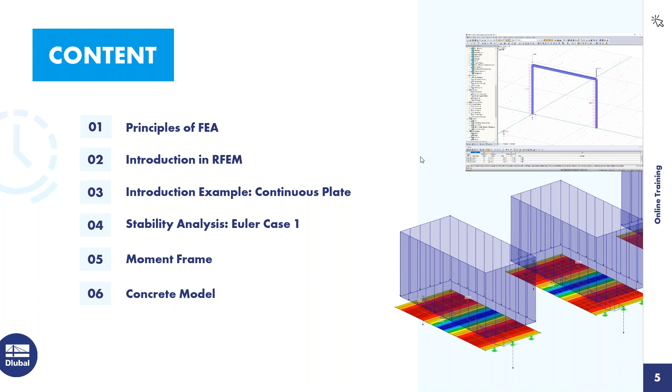So now we can dive right into the first subject, which is the basics of FEA software. When using computer software like FEA software, it is mostly and usually based on the displacement method. Another method you may be aware of is the force method, where the unknown is the force and the internal forces need to be calculated or can be calculated.

With the displacement method, the unknown is the displacement. So to solve for this, the displacement vectors must be calculated, and then the internal forces and support reactions can be determined. So the main problem today is an analytical solution can be difficult to determine with large complicated structures. Doing hand calculations for some structures with complicated and odd geometry can almost be impossible or feel like it's impossible. The limits are being reached with large complicated structures, and it's just difficult to get accurate results.

And so this is where FEA software comes in. Structures can now be modeled and converted into a finite interconnected element mesh. Then the material and cross-section properties are determined or given at each FE mesh node. And then the mechanical behavior is transferred between these elements.

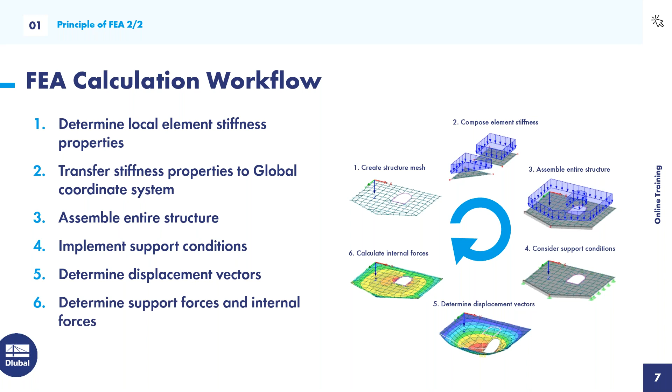So now we can move on to our example. For this example, you can see a couple of continuous plates, and then we are going to compare the moments between these plates with the continuous beam on the end so we can get an idea of how the calculation differs between those.

But before we do that, I do have a question or a test to give, so I'm going to pull that up. You should see that on your screen right now. I'll give everyone about a minute to answer that, and then we can go over the answers.

Okay, it looks like almost everyone has answered, so I'm going to close the question. You can see the results here: 18% of you answered the second option, and 82% answered the first option, and it looks like most of you got it right. The correct answer is that the decomposition of structures into finite elements is what discretization is. So that's great, good job.

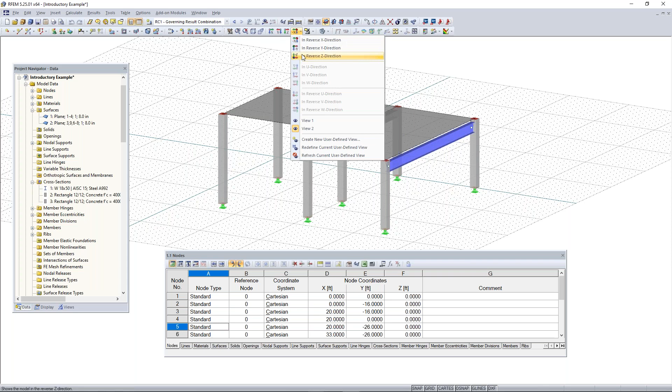We can also change the view of the model. If we go up here, you can see in this category of the toolbar, we have views in the X direction, the Y direction, and the Z direction, and we can also change these into the reverse direction. So if we want an elevation view of our model, or maybe a top-down view, we can choose these views.

In the project navigator, at the bottom we have a folder called add-on modules. RFEM is great for viewing things like internal forces, but if you want to design your structure or elements of it, you'll need to use add-on modules, which all student versions of RFEM come with. You can play around with these, and they're organized by material design type. You can also find the add-on modules up here in the toolbar, organized again based on design.

Next, in the project navigator we have our display tab. This allows you to turn aspects on and off within RFEM. For example, we can turn off our surfaces, which just turns off the rendering and display. The surfaces are still there in the analysis, but this lets you turn them on and off visually. You can see it's all organized based on expandable and collapsible folders, so things like loads and results can be turned on and off as well.

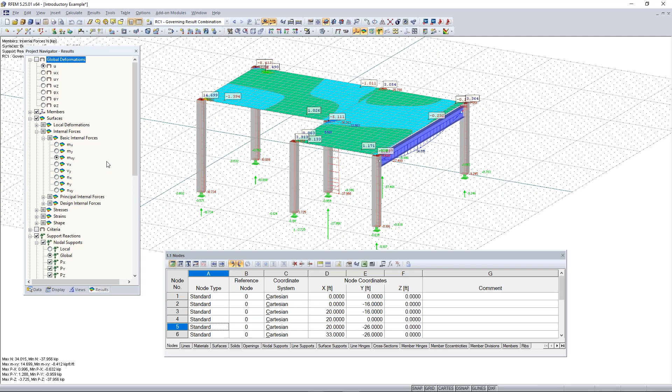The next tab, if I turn off my visibilities, is the results tab—the last tab in the project navigator. If I turn on my results, the results tab will pop up, and it's organized similarly to the display and data tab. I'm not going to go into the results in detail right now, but we will later in our other examples, so I'm going to turn these off.

The last thing to go over before our example is how to navigate through RFEM. You can click the scroll wheel button to move the model around, use the scroll wheel to zoom in and out, and hold Control and click the scroll wheel to rotate the model. If you don't have a scroll wheel, you can use the Move, Zoom, and Rotate tool: left click to move, hold shift and left click to zoom, and hold control to rotate. You can also do all of this with the arrow keys on your keyboard, which perform the same functions.

Now we can open our new model to start modeling our continuous plate example. First, let's go to the new model button—this creates a new model. You can also do this by going to File and clicking New. We'll go to the model name, and we have to give each model a name, so we'll name this 'continuous plate example.' You can also enter a description for your model, though this isn't needed—it's just an option.

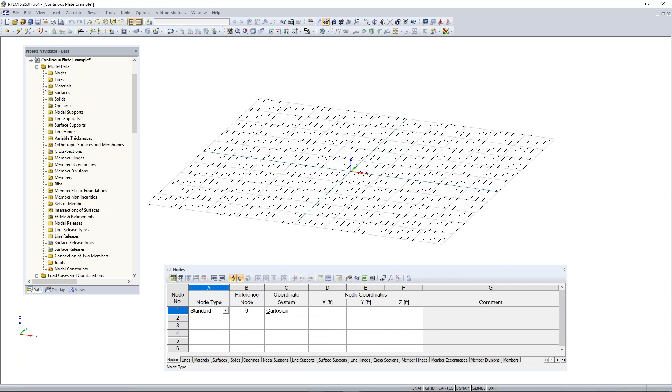So the first thing you'll notice is when I open my new model is my work window is blank, and my grid is here in the work window blank and lying in the XY plane. My tables all blank and everything. Some materials have come over from previous models, but we'll delete those.

And the first thing we might want to do before we start with our model is take a look at our grid and make sure it's set correctly. So we have our grid points here. They're all distance and spaced by 1 foot, and we have about 50 points in each direction.

And if we want to change the settings of our grid or work plane, we can go up here to this button and click on it. And you can see here we have our work plane settings. So everything up here we don't need to really worry about. This is if you want to change the plane that your work plane sits in. So we'll just keep it as the XY plane and model in the XY plane.

Over on the right hand side here, you can see, like I said, we have 50 grid points in each direction, positive and negative. We'll leave this as default, and then also the spacing for each grid point we are going to leave as 1 foot. So everything here is okay for now for this example, so we'll click OK.

And now we can begin with modeling our concrete plate. So to model a 2D surface in RFEM, it's pretty simple. All we need to do is either go to the Insert menu up here and then Model Data, and then we can go to Surfaces, and you can see we have a lot of different surfaces to choose from.

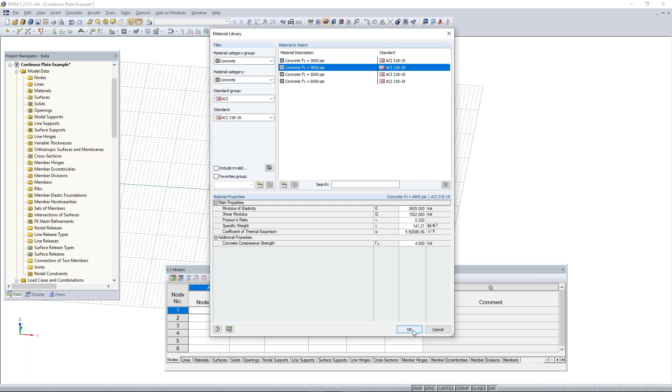Now we have our material chosen, so now all we need to do is tell the program how thick we want this material to be. By default, for imperial units, 8 inches is selected. We want to increase this to 12 inches for these plates. Then we can click OK, and now we can draw our plate.

My cursor has turned into this reticle-looking cursor, and I also have the coordinates right next to it telling me where I'm located along my XY grid plane. So I'm going to choose the origin, and then draw a 32 by 16 foot plate. All I need to do is move over horizontally 32 feet, and then move up 16 feet in the vertical direction, and then left click.

So left click at the origin, and then left click a second time to mark that second point. Then I can right click, and once I right click, that will cancel out of the tool. You can also hit escape if you like to cancel out of a tool.

Now you see we have our plate here, or our rectangular concrete surface. The rendering in RFEM is just simply a 2D element with boundary lines defined, but in the calculation the stiffness will be taken as 12 inches thick, so no need to worry about the rendering. This boundary line is always located at the center of the surface, so there will technically be 6 inches on one side and 6 inches on the other side.

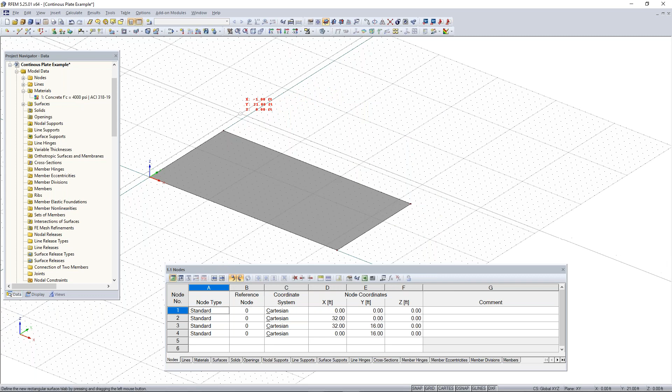I can model the other plates by just going back to that tool and clicking OK. I'm going to model the second plate right above the first one, and it's going to be 5 feet away from the first plate. So I'm just going to draw this one, and again it's going to be the same dimensions, 32 feet by 16 feet. Then I can right click to exit out of that.

Let's say I already have this surface here and I need to just duplicate it. I can simply select this second plate here by highlighting it from right to left or left to right, and then I can use the tool up here called Move and/or Copy.

This tool allows me to make one copy of the element that I selected, and then I just need to tell it which way I need to displace it within the plane. I can either enter those displacement vectors, or I can use this graphics tool here by clicking this button and simply moving the plate.

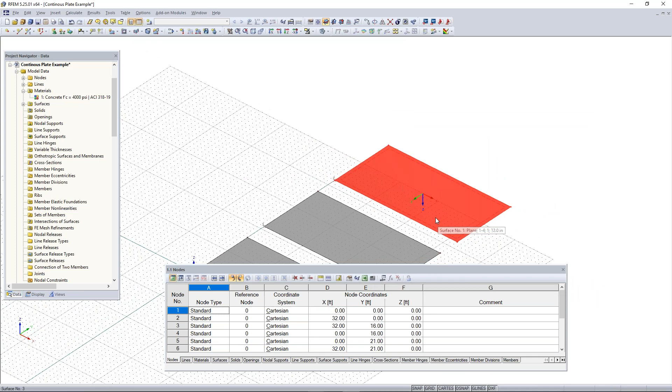I'll choose my bottom point here, and then I want this bottom point to move 5 feet above where this plate's located, so that'll be this next point. I'll hit OK, and now I've made one copy of this plate and moved it that much more in the Y direction.

Now we have all three of our plates here, and since my grid is only 50 feet by 50 feet, I'm just going to highlight all of my plates here, left click, and then I can move my plates down into more of the center of my grid.

Next thing we want to do is model our beam. So what I'm going to do is create a new cross section or create a new member. To create a new member, we can either go through the insert menu or choose the button here, new single member. So I'm going to click on new single member.

Under new single member, I'm going to go to the cross-section library. This is the new single member dialog box, kind of similar to the surfaces dialog box where we can choose our member type. For beams and columns, we want the member type beam, and then for our cross-section, we can choose cross-section start.

We can either create a new cross-section or go to the cross-section library to choose from a predetermined cross-section shape. So I'm going to click on the cross-section library.

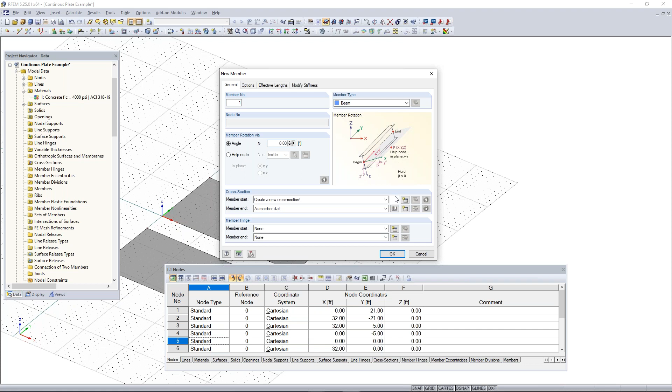Once that pops up, you can see our cross-section library is organized by rolled and built up sections based on a standard. Then we have our parametric thin walled sections where they're parametric, so you can choose the dimensions manually for each of these. We have parametric massive, usually used for concrete, and parametric timber, which you can again use for timber and choose the dimensions for.

Since we're using concrete for these plates here, and they're rectangular in shape, we're going to use the rectangular cross section.

Then you'll see the rectangular cross section parametric window pop up, and then we can change our parameters. So we can make the base 40 inches, and then the height we can make 12 inches.

Now that we have our dimensions in, we can choose our material, just like the surface. Since we already defined this concrete 4000 PSI material, we can just simply use that instead of having to go into our material library again. So we can click OK, and then click OK out of that box.

I'm just going to draw this continuous beam 5 feet above this plate, so it resembles this plate, and then we can easily compare it in results later on.

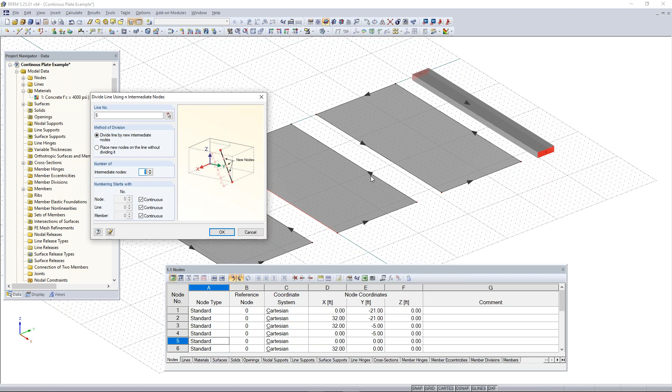The next way we can do this is by right-clicking on this line, and we can divide our line by intermediate nodes. So when I choose this option, arrows will pop up on each of our lines, telling us the orientation that we drew the line. This helps us if we need to know that.

So what we can do is choose how many nodes we want to divide this line equally by. We're just going to choose 1 and click OK. And then you can see the line is divided equally with just this 1 node in the middle. So then we can do the same thing for this line and click OK. And now we have our 2 lines divided by our nodes.

The third option for dividing a line is to use the distance tool. With this tool, you can divide a line by distance and get a little more accurate on where you place your nodes. This is mostly why you'd want to know the orientation of your member when dividing a line, so you can see I've chosen this line, here's the start, here's the end, and I can type in 50% from the start or 50% from the end, or a specific distance. You can see 50% is halfway through 32 feet, so 16 feet.

And we want to use the true line length, and then we want to divide this line by a new intermediate node. So I'll click OK, and you can see it's divided halfway through, and then I can do the same thing for this last one.

So now what I need to do is divide also this member. I can just do that using a distance, halfway through, and I'll click OK.

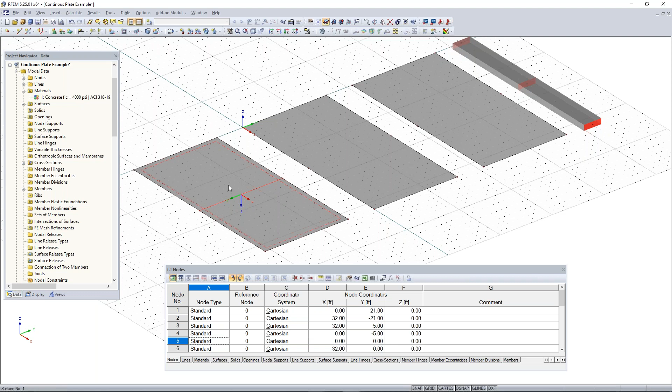And then I can exit out of that tool, and instead of drawing the rest of these, I can use this pretty powerful function where I can click and select a line. And whenever you click and select something, you can hold Control and left click and drag, and that allows you to make a copy and drag that element to wherever you want. So I'll left click, hold Control, and drag this line again to the last plate there.

And now we can add in our line supports. So within RFEM, there's two different supports. We have nodal supports for just single points, or line supports to support the whole entire length of a line.

So I'm going to go up here to the button New Line Support, and I'm going to add in hinge supports. What I can do is choose from two different presets we have for line supports. The hinge support is fully fixed in translation, but fully released in all of rotation. And the rigid support is fully fixed in all 6 degrees of freedom. You can see how that is checked, showing you how the condition is defined. So I'm going to use the hinge supports and click OK.

And then I can choose and click on each of my lines here, and I can simply do that for the rest of my lines to add in my supports to these plates.

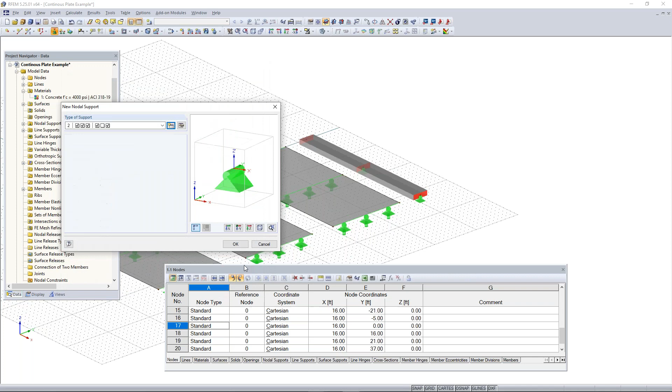The reason for this is because if all 3 of these supports on this beam were simply hinge supports, then the beam would be able to rotate infinitely about its X-axis, causing an instability within the program. So we need one of these supports to lock the rotation about the local X-axis.

You can see if I right click on this beam, I can show the local axis system by right clicking and going to the shortcut menu, then the local axis system. Now you can see the X-axis as well. I'll right click and turn that off.

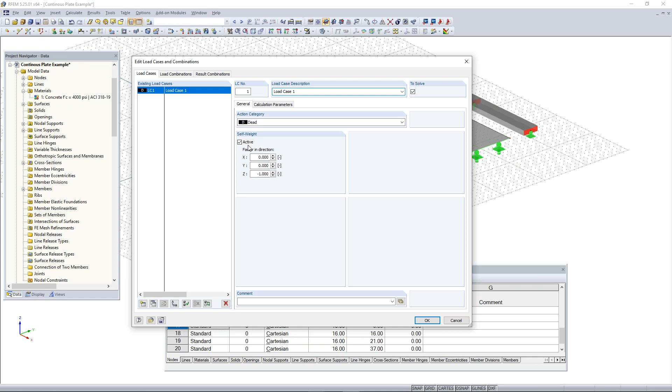What we need to do now is just enter in a description, so we'll name this load case 1, since we're not designing this according to any standard and the action category isn't too important right now. You can see that self weight is automatically turned on for dead load. For this example, we don't want self weight activated, so I can uncheck that option.

You can see that the -1 in the Z direction for the factor in direction is applied. What this does is basically multiply this factor by the self weight of the model in the downward direction to simulate gravity. We'll turn this off for now and click OK.

Now what we want to do is create surface loads for our plates here. So I'm going to go up here to new surface load.

This button here, new surface load, just to go over this, you can see we have a bunch of different loading options within the toolbar. We have nodal loads, member and line loads, surface loads, and then solid loads. Mostly we're just worried about member loads and surface loads.

You can also find this loading information up here again in the insert menu if you have trouble finding the correct loading type you need on the toolbar. So again, we'll click on the button, new surface load.

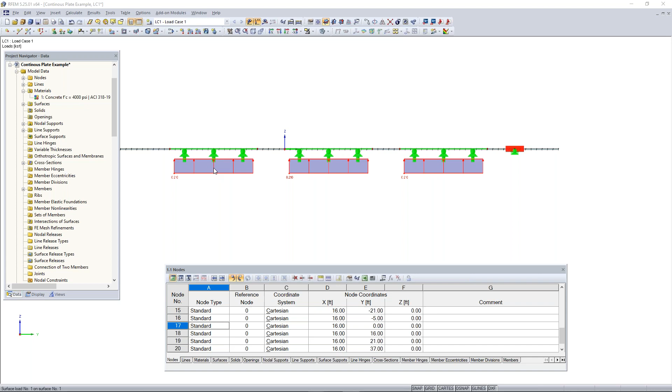I can drag from right to left to select my loads. I can select all of them, double click them, and then all I need to do to change the direction or flip the direction is add in a negative sign. I can click OK, and then I can rotate my model back. You can see my loading has been added.

I can also turn off this grid in the background now that we're done with modeling, to get a cleaner look. So I can go down here, and these buttons are used to turn off certain functions like snap and grid. You can also change your grid to a polar grid, but we'll keep it as Cartesian. You can also turn off some other things like guidelines. So we'll just turn off the grid, and now you can see we have just a cleaner look, better for presenting.

The next thing we need to do is add our loading to our member. For our member loads, we want to use member loads - always keep that in mind. For lines, you want to use line loads. That's how you know the difference between these two. Since we're applying a load to the member, we want to use member load.

This member loading is going to be the same as the uniform load or the surface load that's applied here - it's just going to be converted into a linear load. So we'll keep the load type as force, and it's going to be uniform. Direction, it's going to be a gravity load, so global z direction, we'll keep that the same. Then all we need to do is enter our magnitude, and this magnitude is going to be 0.210 kip per feet, which is basically 210 pounds per feet.

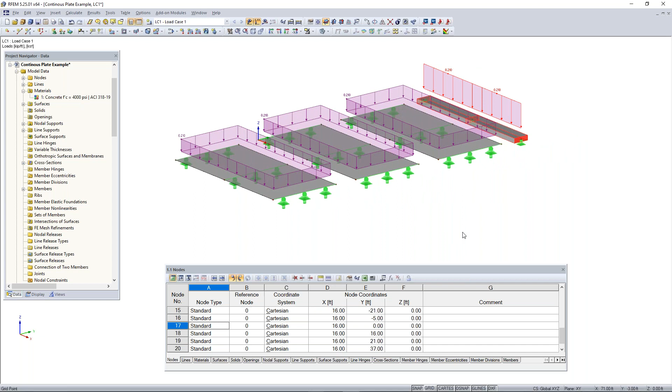And then we can now add in or edit our FE mesh. FE mesh for members is not too important, but FE mesh for surface elements within RFEM is pretty important - this is what you need to look out for. What we can do is go up here to calculate, and we can just see what the global FE mesh looks like when we hit generate FE mesh. You don't have to do this before any calculation, but for example purposes, I just wanted to show you what the FE mesh looks like.

It's easier to view if I turn this into a wireframe view since it's gray on gray, but you can see this is what each FE mesh element looks like on our surfaces here. If I go to calculate and go to FE mesh settings, by default, the FE mesh in imperial units has a target finite element length of 1 foot for each of these mesh elements. This actually looks pretty good on our surfaces, but for example purposes, if we need to refine our FE mesh for certain elements, you can do this.

So what I'm going to do is add an FE mesh refinement to each of these surfaces with different lengths. I'm going to turn off the global FE mesh for now, and then right click on the first surface, turn this back into a solid transparent view. I'm going to right click on the first surface and go to FE mesh refinement, then go to new.

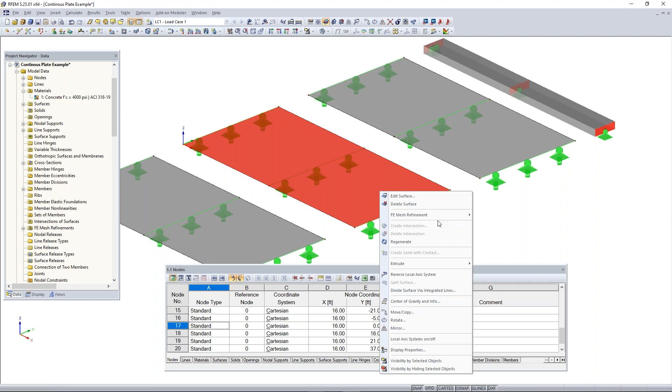Now we're going to do the same thing for these other two and increase the FE mesh length to see what that looks like. So we'll right click on the second surface, go to new FE mesh refinement, create a new FE mesh refinement, and instead of 0.2 feet, we're going to make this one 0.4.

And then the last one, we'll do the same process. You can see those other refinements I created could be chosen as a preset if we didn't want to create a new one. But for this surface, we want to increase the length to something like 0.6. We'll click OK, click OK again.

If I go up to the calculate menu and generate FE mesh, then turn this into a wireframe view and display the FE mesh, you can see this little symbol on our surface telling us we have an FE mesh refinement on the surface. Those symbols are the same shape, telling you easily what the FE mesh length of the refinement is. You can see the difference in FE mesh length between these from 0.2 feet to 0.4 feet to 0.6 feet. That's an example of how FE mesh lengths can change over these different plates.

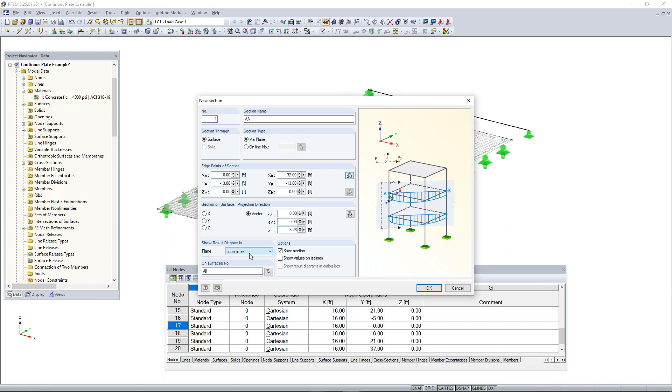Then the next thing we need to do is choose which plane the section cut will be located in. The local positive Z axis is good, and that's the local Z axis of the plate. Since it's lowercase, you can see you can also choose the global axis system as well. Then we want to save this section and click OK. Now you can see these dotted arrows here are telling us we have a section cut, and you can also see the name of the section cut there as well.

Then if I want to add more section cuts, one to the center plate and one to the third plate, instead of going through that process again, I can simply hold Control and drag and drop my section cut. It did not copy, so let's try that again. Hold Control and then we can drag and drop. Control Z is also a great function to undo things. So we'll try this one more time. The drag and drop feature right now is not cooperating, so let's try one more time.

There we go. Then we can do that just a third time for our third plate. So hold Control and then left click and drag, and I'm just going to make that copy. Now we have our section cuts on our plates.

Then I can change the names of these section cuts. Right now this one's AA, but these ones have odd names to them. So I can go into my project navigator, go to my sections folder here and expand that, and you can see the names here. I can double click on one of them and change this name from AA to AB. Then I can change this third one to AC and click OK.

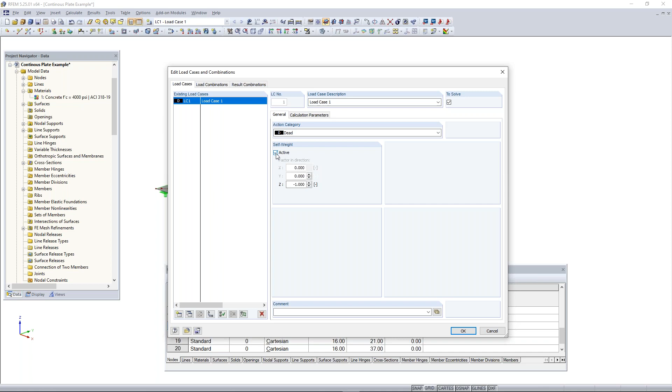If I click OK, the self-weight is now activated. If you wanted to see a graphical representation of the self-weight, or you're curious how that worked, you can go to the display tab and the navigator, then go to the loads section, turn on my loads, and also turn on my self-weight loading. So that's normally hidden, but if you wanted to view what the loading of the self-weight looks like, you can see that there as well.

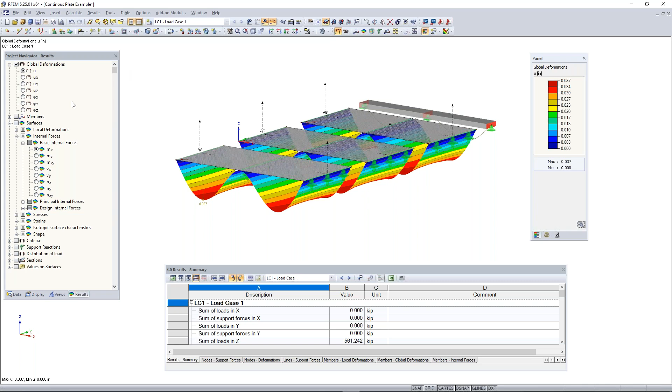For this plate, we're getting a max deflection of 0.037 inches. When you run your results, this panel pops up on the right-hand side, color-coded for the surface deflections, showing the max deflection of 0.037 inches. We can also take a look at our member deflection here.

That's for our surfaces. You can see the deflection shape of our member is simply this yellow line.

If I want this color coded as well, with a colored cross section, I can go to display, then into results, expand deformations and then members, and turn on colored cross sections. Now you can see the rendered colored cross section deflection shape of our member, giving a better visual — it's basically almost the same as the deflection for our plates. We'll go over comparing these results in a little bit.

The next thing we can view, if we turn off our deformations, is the results on our single member. If I check on members and then under internal forces, I can check off the option to view our axial forces.

We can also view our shear forces. VZ is for shear in the local Z axis. If I right click and turn on the local axis system, you can see the local Z direction — this is the shear in the local Z direction. If I turn this in wireframe view, we can get a nice look at what that shear diagram looks like.

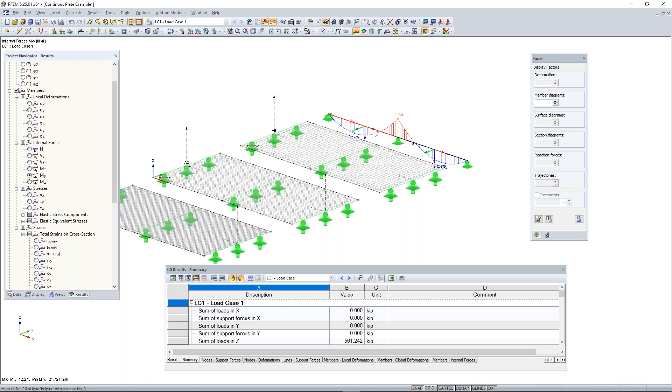Next we can also view our moments about the local y-axis, and take a look at what that moment diagram looks like. Looks like we get a max moment here of negative 21 kip feet.

Next we can also view the surface results, for example the internal forces of our surface — the moments, or Mx, along the local x-axis. I can show the local x-axis of my surface by right-clicking on it and turning on the local axis system for all surfaces.

Now you can see what that axis system looks like — it's a little similar to the member axis system. These are the moments along the x-axis, and you can see it's color-coded. This panel on the right-hand side gives you your max and minimum results and that color coding as well.

You can also take a look at shear on our surfaces — this is shear along the x. Then we can take a look at our Nx, or our N forces, the axial forces on our surface. We don't have any right now because there are no forces in that direction.

Next we can also look at our support reaction. If we go down to support reactions, I can turn that on and you'll see what those look like. The line support reactions are a little more complicated, but this is just the forces or reactions along the line — it's going to be a uniform reaction there.

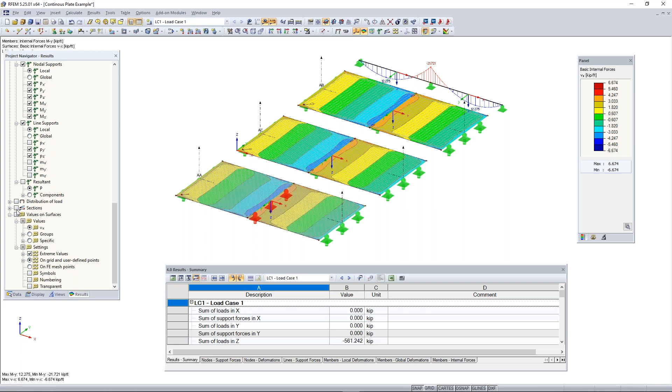Now that we've gone over the results, we can take a better look and activate the section cuts here. Now that we've added these section cuts along our surface, we can turn those on, and we can basically see what the shear of the surfaces are with a shear diagram and that section cut plane. Right now you can maybe get a better look at how those results differ in accuracy between these different plates here.

That all depends on the FE mesh size, and you can see the accuracy increases the smaller your FE mesh gets. Right now we're looking at negative or max shear force in the center of our plate of negative 3.397, and this was for the surface with the smaller FE mesh. You can see how that changes by just a little bit - negative 3.397 and then negative 3.398. You can see how that changes depending on the size of your FE mesh.

So like I said, you can go to the calculate menu. This is a good time to talk about how to choose the size of your FE mesh. If we go to the calculate menu and then go to the option here, calculation parameters, we can go under the global calculation parameters tab here.

To show this better graphically, under Bernoulli's you can see that the deformation is perpendicular to the member axes. Then for the Timoshenko theory, you can see we have an additional angle here, so we have additional deformation. This is due to that limited shear deformation or shear stiffness, and since it's not completely rigid, we're going to get an increased deformation when taking this into account.

So a similar theory to Bernoulli's, but for plates, is the Kirchhoff theory. And then a similar theory to the Timoshenko theory is the Reissner-Mindlin theory, which works for plates as well. So here are the assumptions.

For the Kirchhoff theory, we have to assume that we're using a geometrically linear analysis and small deformations. For the material, we're using Hooke's law, a linear elastic material. Cross sections are assumed to remain flat with no warping. We're assuming constant thickness. And most important, we're assuming there is no consideration of shear deformations.

Then for the Reissner-Mindlin theory, we're assuming basically the same aspects as the Kirchhoff theory, but most importantly, we're taking into consideration shear deformations, and we're also taking into consideration transverse and lateral strains. These two assumptions are the same as Bernoulli's - for Bernoulli's we weren't considering shear deformations, whereas for Reissner-Mindlin we are. Now, for taking into consideration transverse and lateral strains, you may be wondering what that looks like.

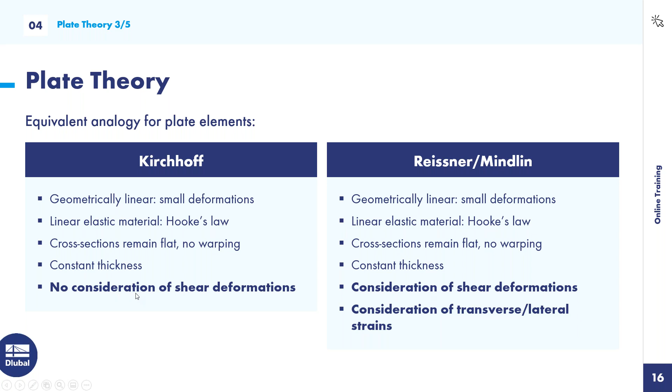Just to summarize these two theories again, the Kirchhoff theory and the Reissner-Mindlin theory. With the Kirchhoff theory, again, we don't take shear deformations into consideration, and so this theory yields great results when used for very thin plates - for example, concrete slabs work great - for pure bending load bearing capacity. So this is just a simplified approach.

Then for the Reissner-Mindlin theory, again, shear deformations are taken into consideration. This theory is great, and the results are great for thick and thin plates when using this. And for the shear influence component, this is relatively high, and there's significant error when neglecting shear forces. So if we have a very thick plate and we neglect the shear deformations, such as for the Kirchhoff theory, then we're going to have some error there compared to realistic results.

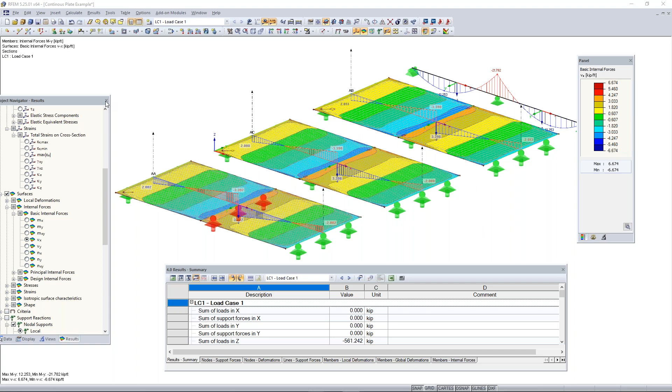So now we can switch back to RFEM, and then we can take a look at where we can change those two theories within the program. If we go up here to calculate, then to the calculation parameters, we can see under global calculation parameters, we can go down here to plate bending theory, and you can see we have Mindlin and then Kirchhoff. So this is where you can change between the two theories. And again, this option up here, activate shear stiffness of members - this is kind of basically switching between the two, Bernoulli's theory and the Timoshenko theory.

So if you wanted to compare your hand calcs in school compared to the calculations within the program, and maybe you're seeing some different deformations for your members or for your plates, the issue could be that you're assuming infinite shear stiffness when in reality the shear stiffness is limited. So turning off this option would yield the same results.

So then if we turn this to the Kirchhoff theory and hit OK, we would have to rerun our results so we can see what those look like. And once those results run, it should be pretty quick. You can see that we're actually now getting lower shear forces in our plates. Before we were getting something like negative 3.8, and now we're getting forces like 3.5. You can also see how the results differ between these two plates with the different FE mesh elements or lengths.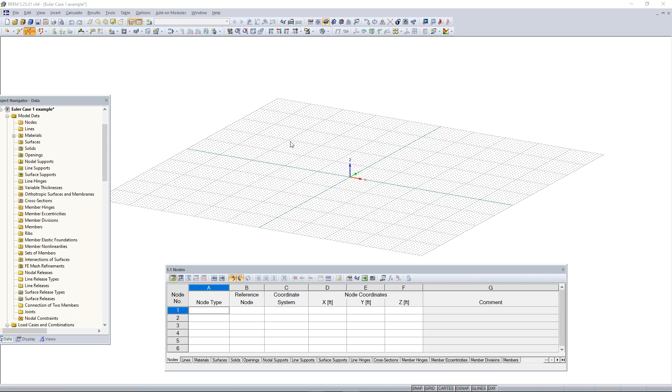The first thing we need to do is create a new member, so I'll go up here to new single member. Under new member, this is going to be a W shape, so we need to tell the program what cross-section to make it. We'll go to import from cross-section library. Once that comes up, we're going to choose a W shape from a standard, so we're not going to enter the dimensions for it. We'll go to our rolled I-sections here and click on our W shape, or I-section, there.

Then we can go to the filter on the left hand side here. Again, this filter works just like the one for our materials, so we can find our cross-section shape based on a standard. We have the AISC American standard, and then we also have the Canadian standard for steel, and also the Eurocode standard, and a long list of other standards for steel members. For this example, I'll just choose the AISC, and then the latest standard, 2015. I want I-sections, and actually I want wide sections, so I'll go to my W sections here, and for this cross section I'm just going to choose a 12 by 35, scrolling all the way down. The material for this I-section will be steel A992.

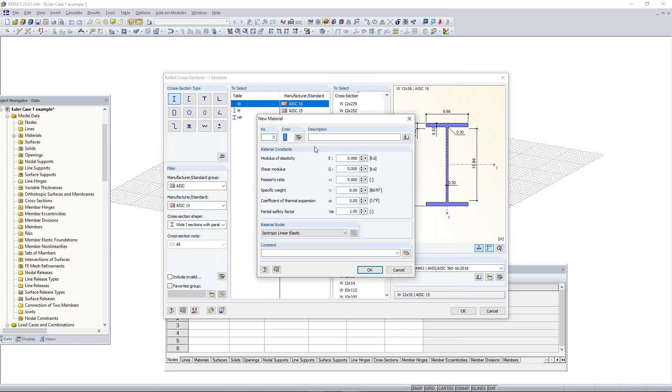Again, you can choose the material for your members by either entering or creating a new material, or we can go to our material library here. Like I said, you can also create a new material if you know the material properties to enter. And now we can click OK.

Once we have our cross-section and material entered, we can click OK again. And this member is going to be a column member.

I basically want to draw this column out of plane, and there's a couple ways to do that. I can change where my grid lies in my work plane by going up to the XY plane, and choose to change this to the XZ or the YZ plane as well. So to draw my column vertically, I'm just going to select the origin, left click, and then draw it 30 feet up. Now my column's drawn.

Another way to draw something perpendicular to the work grid is to choose this option in our panel, length and direction. I could have just typed in 30 feet, chosen perpendicular to work plane, this option here, and positive, and then you can see that I could have placed my column like so, anywhere perpendicular to the work plane. So a couple of different options to choose from. I'm just going to delete this.

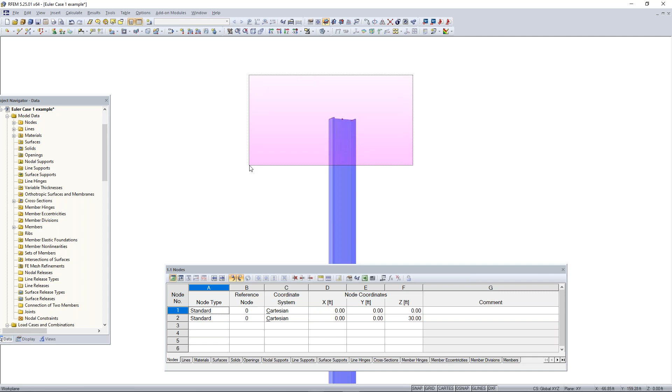Something to go over real quick is highlighting things within RFEM. You can drag from right to left or from left to right, and this will only select objects fully engulfed within this box. So you can see I'm only selecting my node. Maybe it'll be easier to see up here. If I drag from left to right, only my node is being selected, but if I drag from right to left, anything touching this box will be selected. So now both my node and my column are selected when dragging from right to left.

This is helpful because if we go to new nodal support, instead of hinged, we're going to choose the nodal support hinge or rigid. So now all 6 degrees of freedom are selected. I'm going to click OK.

Then what I can do is just drag from left to right. Now you can see that only selected my node, and it also added my rigid support to the node there. I can make this a little bigger to see, or actually I can't right now. But now you can see we have our column fully supported at the bottom.

Now we just need to create our loading. I'm going to go up to my new load case button here to create my new load case. I'll click on that, and then the edit load cases and combinations dialog box should come up. You can see again, our dead load case is automatically created. I'm just going to name this one test, and we also want to turn off self-weight for this example.

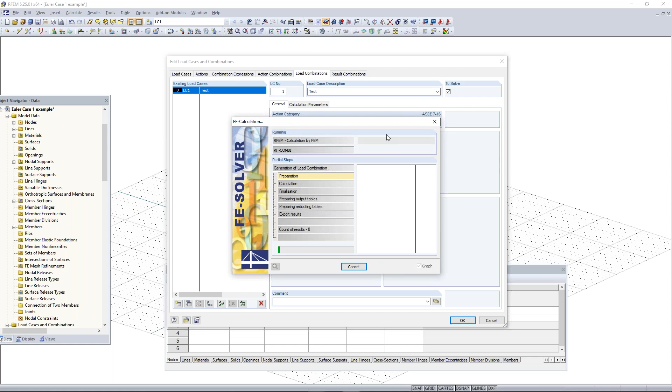I'm going to click OK, but I did also want to show you that our load combinations are then generated automatically. We only have one load case, so we're only going to have one combination for LRFD and ASD, but you can see how that works when you have other load cases with different actions. We also have our result combinations that take all of the load combinations, create an envelope solution, and show you the max and min results. That's just a quick overview of how creating those automatically works. We only need one load case for this example, so we can leave all this the same and click OK.

The next thing we want to do is add a load to the top of this column here. For this one, we're only adding a point load to this node right here. So I want to go to the load tool, new nodal load. Once I click on that, the dialog box will pop up to use this tool. It's pretty simple. You can just add in your forces in either the X, Y, or Z direction, or add in your moments about the X, Y, or Z axes.

So for this, we just want to add in a negative load of -5 kips, and then a lateral load in the X direction of 2 kips. You can see what that looks like on the right-hand side here, and what that is going to look like on our node.

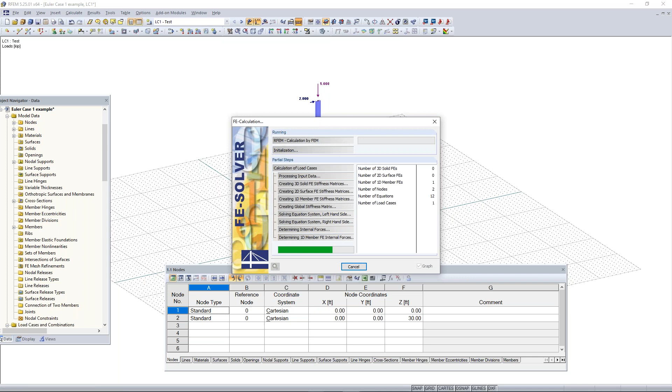Now I need to show you something pretty important. If I click on calculate all, this is going to run through our load case, load combinations, and result combination. I'm getting an error for very high deformations, but what we can see here is our global deformations. In the elevated view, turning off tables and grid, you can see we're getting a max deflection in the x direction of 3.782 inches.

I can also display this as a colored cross-section to get a better look. This is what the deflection of our column looks like with the applied loading. Again, maximum deflection is 3.782 inches. We can also take a look at our member internal forces.

If I check on members and take a look at the MY results, the moments about the Y axis, you can see at the bottom here at the support we're getting a max moment of negative 60 kip feet. Try to keep those results in mind.

For load cases, this is basically a linear calculation or first order calculation, and I want to show you how this differs from a second order calculation.

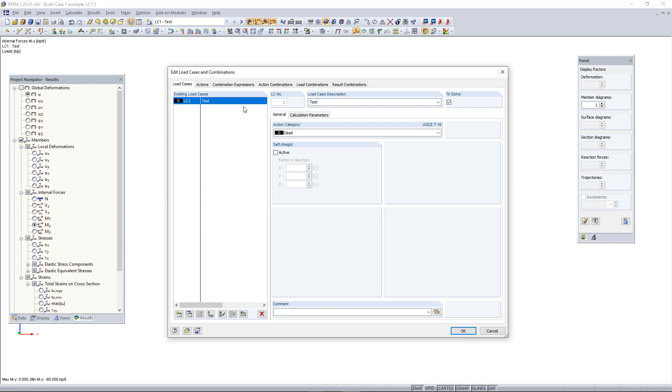So now I'll go back to the load case and load combination window. If I go up here to edit load cases and combinations, and then we go under our load cases tab, under our test load case here, we can look at the tab called calculation parameters. Everything else, we mostly just want to look at the method of analysis here.

By default, load cases in RFEM are calculated based on a first order analysis, and load combinations are calculated based on a second order analysis. So this load case is being calculated by a geometrically linear analysis, and we can change this first order linear analysis to a second order analysis. You may recognize this analysis as taking into account little p delta and big P delta. That's what a second order analysis considers.

Basically this linear analysis sets the equilibrium of the beam based on the undeformed system, whereas a second order analysis sets the equilibrium based on the deformed system. I can show you that the deformation and bending moment is going to increase if we run our results.

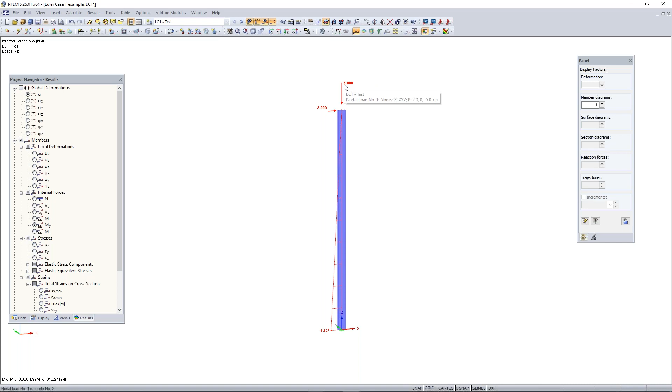Next thing we want to do for this example is to change the loads to only 100 pounds in the axial direction. So what I can do is drag from left to right and then change the loads by double clicking on them.

What I want to do is change this from -5 kips to -0.1 kips, or -100 pounds. Then I want to change the x direction, or the lateral forces, to 0. So we'll click OK.

Then what I want to do is open the RF Stability add-on module. Let's say now we want to run a stability analysis on this structure. In the project navigator, you can scroll down and find the list of add-on modules.

We have a favorites folder here, so if you want to save an add-on module to your favorites, you can right click on it and select favorite, and then it will be added there, so it's not hard to find if you use it frequently. But what I can do is go to RF Stability and double click on it. And like I said, all students have access to all of these add-on modules with the student license.

Once the add-on module pops up, this is what it looks like. It's basically just a dialog box within RFEM, and all of the information from your structure in the background is taken into account within this dialog box. What RF Stability does is it uses the help of eigenvalues and different eigenforms to perform a stability analysis.

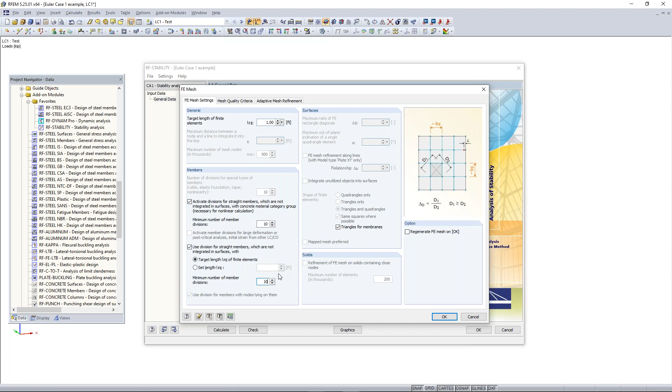Under the minimum number of member divisions, this is only set to 2. For this example, or for your members, you want to increase this to 10. This is important and just increases the accuracy for the division of your members, which is mostly how the program meshes everything in the background.

So we'll click OK. And then the next thing we can do is up here, we just want to make sure that we're choosing the right load case. So we're going to run the stability according to load case 1 here. You can also run your stability analysis according to a combination as well.

Everything else we can keep the same as default. Calculation methods we don't need to worry about right now. So we can go over here to calculate, and once we click that, the calculation should run pretty quickly.

Now you can see we have our critical load factors and magnification factors shown here. The critical load factor on the left-hand side you can basically think of as the amount you would have to multiply the loads by in order to get an unstable system. Or it can also be looked at as the total percent of the loads your structure can take.

For example, this critical load factor is 135 for our first eigenmode, and this is really good. If this was below 1, then we would have an issue, but we don't need to worry—we could probably just increase the loading or decrease the cross-section size and material of our structure with this critical load factor.

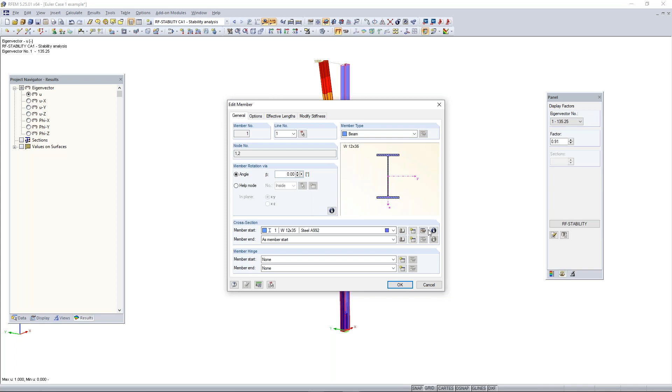The reason for this is pretty simple, because the moment of inertia for this W shape is the lowest about the z-axis and highest about the y-axis, so it makes sense why it will deform in that direction first.

So now let's swap back to RF stability. We can either go to our data tab and double click on RF stability, or go to the panel and click the RF stability button.

Under our RF stability add-on module, we can take a look at our effective lengths factor, and next we can show what it looks like when the structure is unstable because the loading is too high. We need to change the loading at the top of our beam or column to something higher that would cause instability. Right now we only have 100 pounds at the top of this 30-foot long column, so that's why our critical load factor was so high.

Let's say we change this loading, just for example purposes, to something like negative 14 kips. We can then click OK.

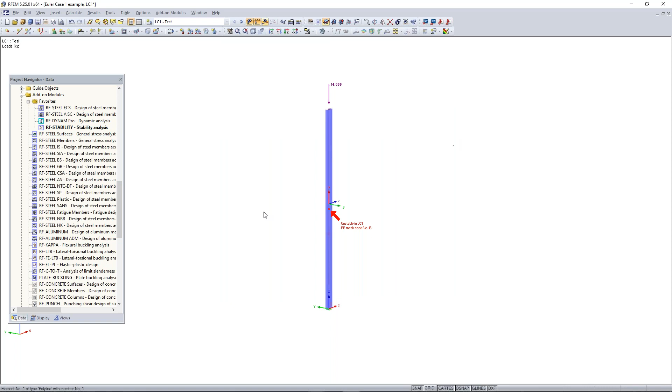We also need to consider, if we're getting an unstable structure and we run this calculation, we might get an error message saying the stiffness matrix is singular and the model is unstable. It's still possible to calculate the critical load factors and buckling in the RF stability module. If you get an error like this and you're sure your model is all connected and set up properly, the first thing you'd want to do is go to your load case 1, or dead load case.

Right now we have P-delta turned on, taking into account second order effects. To run a stability analysis, we need to make sure this is set to a linear analysis. I'll click OK, and then go back to RF stability.

Under RF stability, we'll again set our load case to our first load case. Make sure it doesn't have any second order effects to it, because if it does, we'll get an error with RF stability. So we'll run the calculation.

Now you'll see that our first critical load factor in our first eigenmode is lower than 1, which is not good. This means our structure can only take around 96.6% of the loading we applied to it, which is not good. It means it's unstable. This is how you can check if your structure cannot take the loading applied to it. You want to make sure all these critical load factors are above 1.

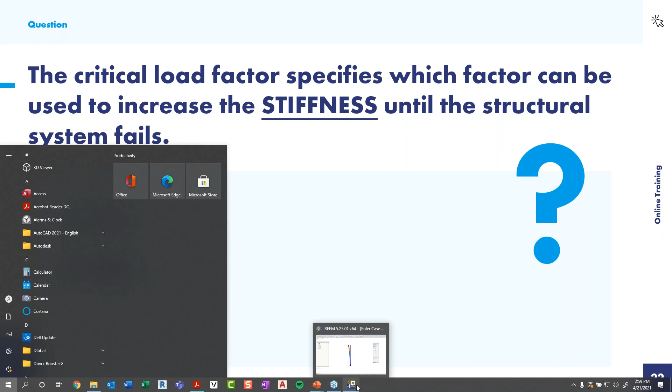So if we hop back to RFEM and look at our stability for this example where we increased the loading, this critical load factor is below 1, meaning that the loading on our structure, the negative 14 kips, is too high.

So then we can turn these results off, and show the loading again for our load case 1. Right now we have negative 14 kips applied for our gravity load.

So if we change this to something smaller, like negative 5 kips, and then just to reinforce, if we run these results and go to our stability and calculate, we should see again a critical load factor above 1 for a more stable model, so 2.

So now we can move on to creating a moment frame out of this column here. If I turn off the results and turn my grid back on, we can right click and turn off the local axis system. Then I can take this whole column here, highlight it, and hold Control to make a copy of it 10 feet away. So now we have two columns here that will act as our moment frame.

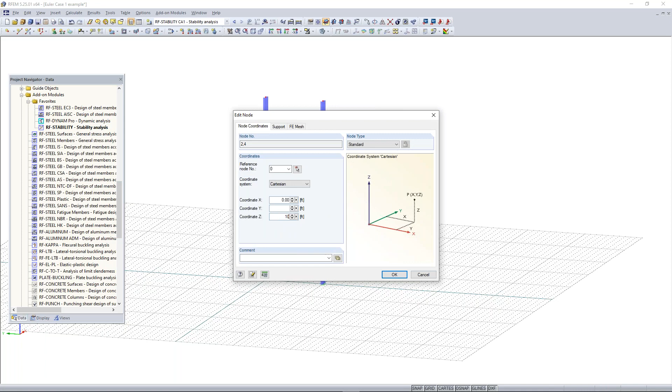Another thing we can do is shrink the height of these two columns at the same time by highlighting only the nodes at the top of them and double clicking on them. Then we can shrink this down to 10 feet. Now we have two columns here, both 10 feet high, and we can simply draw the beam at the top to connect them.

So we'll go to our new member, and create a new member to act as our beam. This will open our cross-section library, so we'll go to I-sections again, then under I-sections we can go to W, and scroll down to something like an 8 by 15. We can click OK, choose the same material, click OK again, and then simply connect both of these columns here for our beam.

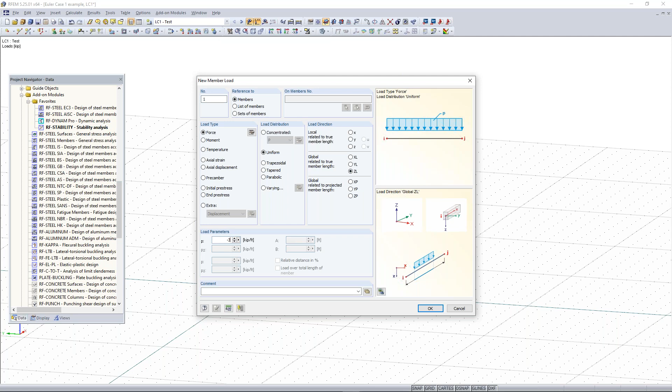The next thing we want to do, now that we have our moment frame, is add some loading to the top of our beam. To add a member load, we click on new member load, choose a force uniform, and for load direction we'll choose the global Z direction. Our magnitude down here will be something like -3 kip per foot. We'll click OK, add in our load, and choose our beam. So now we have -3 kip per foot applied to the top of our beam.

So now if we run our calculation for this, and actually hit calculate all, it will calculate all of our load cases and even the results for our stability, which makes it easier. If I go to my drop down here again, I can see my load cases, load combinations, and result combination. I can go to RF stability.

Then in the panel here, under the factors tab, I can take a look at the eigenvectors or the eigenmodes. I can cycle through them and we can see our critical load factor here is 20, so that's good. Then we can see each of our eigenmodes here for this simple moment frame. We can also see that our third eigenmode is warping or deforming out of plane here.

So let's say we wanted to make sure that normally our moment frame would stay in plane, or have some type of support at the corners here. I'm going to add in some supports here at the top of the corners by holding Control and selecting both of my nodes. This is another way of adding supports - we double click on the nodes there and then go to the support tab.

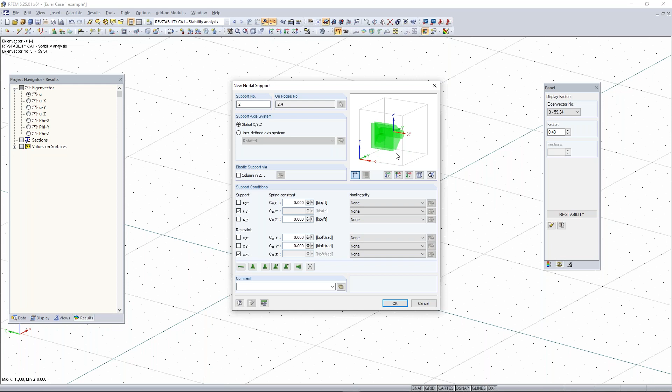Then we can choose available and hit create new nodal support. Under this, I can choose to have those two supports be able to move in the X direction and the Z direction, but not in the Y direction. Then I'll unlock all rotation, click OK, click OK once more. Now you can see those supports are added and that they cannot move, but actually we wanted these not to be able to move in the X direction, so let me change that real quick.

So then we want to change this to the X. Now if I click OK, these supports at the corners here are preventing the frame from moving in the X direction, but it can move laterally in the Y and up and down in the Z.

So if I hit calculate, or calculate all, the calculation will run, and then I get my results for our stability. I can look at my eigenmodes here, and now you can see that all of them, especially this third one, are staying within this XY plane, and we are getting good critical load factors.

So that's how to create the simple moment frame from that column we had, and also how to run a stability analysis on your models.

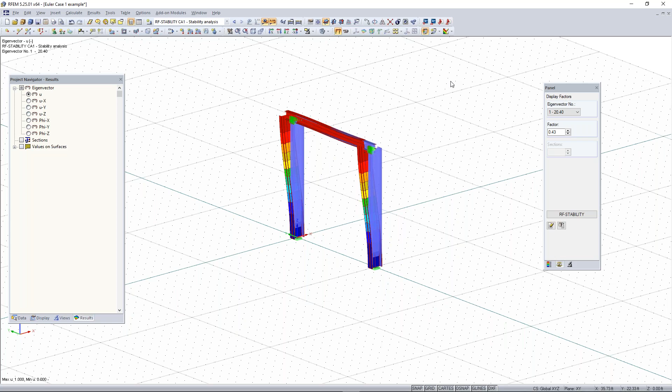Yeah, so we do have a direct integration method with AutoCAD. If I go back to RFEM, you can import models in from AutoCAD, things like center lines are imported as a .dxf file, and if you're integrating line elements like center lines, then that works great. Then you can save the cross-section name and material to those lines in the layers in AutoCAD and have those come over as members.

Keep in mind, members in RFEM are only 1D elements. So within AutoCAD, you need to make sure to have the center lines for the members, because that's the most important thing to have imported over. If you just have the actual shape drawn in AutoCAD, like the perimeter lines or boundary lines, then all of those lines will be imported over and you can't really define the cross section onto them.

With AutoCAD, things like surfaces are possible, but they have to be defined in AutoCAD as 3D faces to be imported over. If they're defined as 3D faces, they can be directly imported into RFEM, but if they're not, only the boundary lines of the surface will be imported over, which isn't too much of an issue. You can use some tools in RFEM to create those surfaces from the boundary lines. Most importantly, for members, you want to make sure you have center lines, and within the layers you can define the cross-section data and material data to be imported over as well.

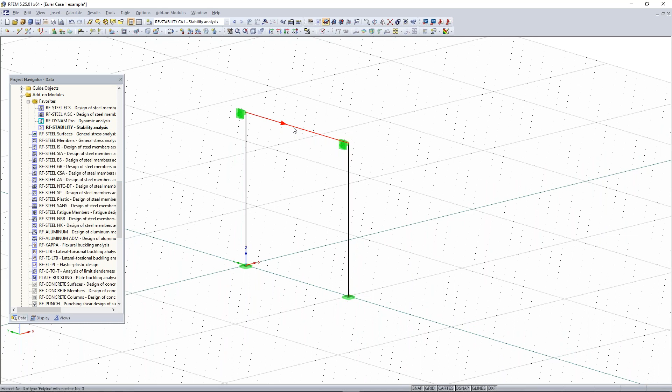If I double click on one of these members, this is a good subject to go over member types. So within creating or editing a member, we have different member types. Beam members can take tension and compression forces, and you can edit the member hinges for the start and end of the member. But then you can also see we have cable member types here.

Cable member types basically only can take tension forces. They cannot take compression forces, just like a cable in real life would act. And you can't edit the member or end conditions of them. Basically, this member type will fail when it takes compression forces, and then it'll be able to take tension forces.

And also we have the calculation method for cables, which would be large deformation analysis. So it is possible to run that. I'm not sure, maybe Amy has some more insight on this as well, but I think that's good, so that's cable elements.

Cable elements can be modeled within RFEM, as Alex mentioned. Automatically, the program will default to the large deformation analysis because we know with cable elements, they're a little special in that the higher the tension force, the increased stiffness of the cable. It's important to know that if you use this cable element, you need to model it with the catenary shape in RFEM. If you prefer not to do that, you can draw it as a straight line and use the RF form finding module to apply a pre-stress force, a sag, or a target length, and the program will come up with the catenary shape for you.

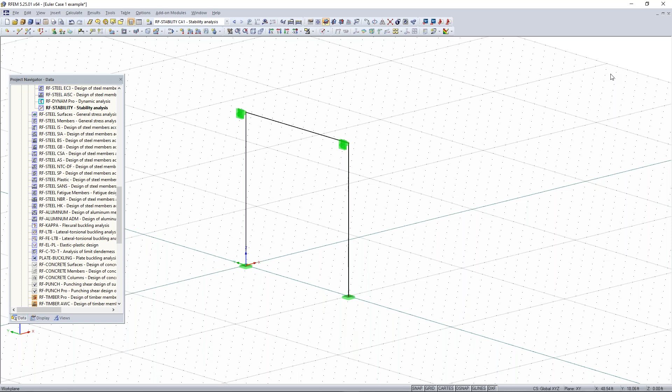If we use two members as one metal column, like a built-up column, can we use RF stability the same way? If you have two members that are modeled separately but form one continuous column that will actually be constructed in the field, RF stability will behave the same way. It maybe doesn't necessarily change the mode shape depending on if the member is broken into two separate segments. Hopefully that answers the question.

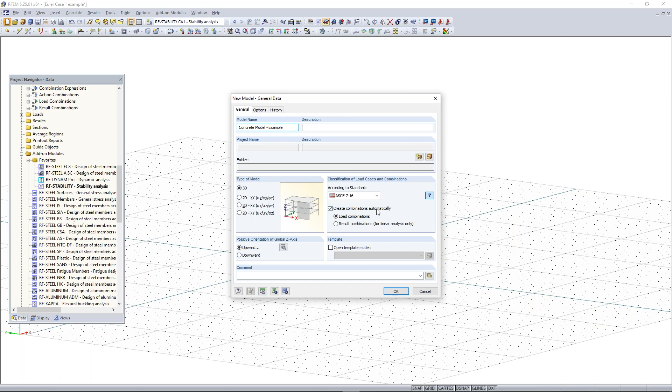So let's hop back to RFEM, and within RFEM we just need to create again a new model. Within the new model general data, we can name this model concrete model, and we'll name this example. For this model we'll keep it as 3D and create our combinations automatically again. So we can click OK.

Our blank model will pop up here, and we can begin by modeling a concrete surface. So we can go up here to new rectangular surface, and for this one we're just going to use the material 4000 psi according to the ACI, and the thickness of this surface is going to be 8 inches.

So we'll click OK, and then I can left click on the origin, and then drag out my surface here. This surface is going to be 46 feet by 40 feet. So we'll go up here and enter 46 by 40.

Then we can go up here to our toolbar and click on this button called Show Whole Model. We can also choose the reverse Z direction so we can get a top-down view of this. And then the next thing we need to do for this model is to create the columns.

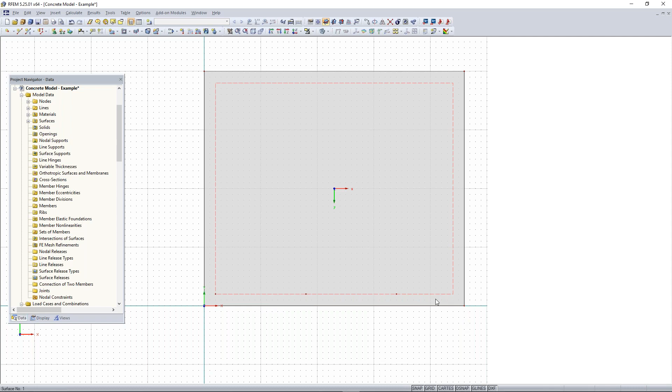Then I just want to create two more copies of this node. I'll go up here, select the node, go to the move and/or copy tool, create 2 more copies, and displace these 2 copies in the X direction 16 feet. So we can move them over, and then since I'm going to have 4 columns within this row, I need to create one more node here.

So I'm going to select this node, hold Control, and then move the node there. Whoops, move the whole thing with it. So let's hold Control and select this node and move it 2 feet up, 2 feet in either orthogonal direction there.

Then the next thing we need to do is create the other 2 column rows. So we can take our nodes here, and if I want to select all 4 nodes, I can either hold Alt and left click and drag to select all of them, or change the model to a wireframe view and highlight all 4 nodes. Then we can use the move and/or copy tool, make 2 copies of this row, and displace them 16 feet in the Y direction. And I'll click OK.

And now you can see that our row here was created two more times, and there's 16 feet between each row.

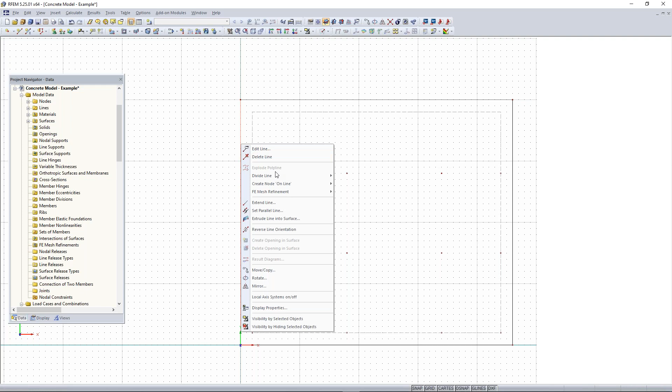Now since this is our floor slab, we want to create the outline for the walls on the outside here. We can use our divide line tool and divide this line graphically. The wall on the left-hand side is going to be 12 feet, in line with this column row. The wall on the top is going to be 28 feet, in line with this column line row.

So now we can proceed with going over how to model the spiral staircase on the outside here. I can go up to the semicircle surface.

Our rectangular surface has other options next to it. If you hit this arrow, we can go to semicircle, and like it says, this allows you to draw a semicircle surface. We just need to give it a thickness and a material, then click OK.

I just need to select the center of the semicircle. I'm going to move down 7 feet, which is the radius from the top here. If I select that, then select my center point and the point on the corner there, now you can see we drew our semicircle.

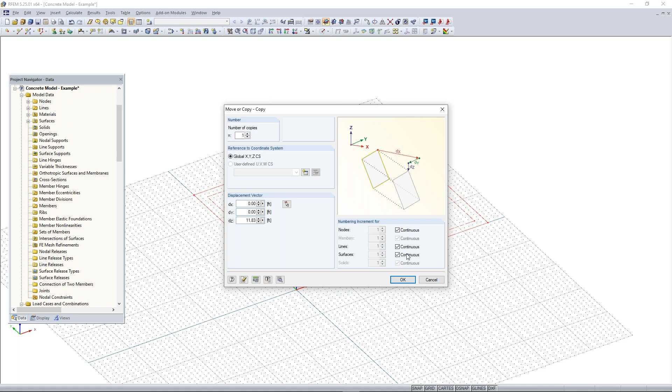The distance between the floor slab and the ceiling slab is actually 11 feet. But since the center axes of the surfaces are halfway between the actual thickness of the slabs, we need to take this into account. So we take half the thickness of the floor slab and half the thickness of the ceiling slab and add to 11 feet, which comes out to about 11.83 feet. So we'll move our floor slab upward 11.83 feet, click OK, and now we have our floor and ceiling slab.

Now that we have both our floor and ceiling slab, we can take a look at it in our isometric view. We can have that view predetermined, and also get a top-down view. But if we look at it from the top down, we can't really see both the floor and ceiling slab.

So what we can do is turn this into a perspective view. Now we can see both the floor and the ceiling slabs, which helps with getting a better view on how our model is going to look.

So we can now divide our lines here. We need to put a circular opening in our slab at the top. You can see that this line, line number 10, if I right click and show numbering, we can see the numbering of our lines, nodes, and surfaces. Line 10 here is one long line.

So what we want to do is break up line 10 into two different lines at this intersection point at node 40. To do this, we use the tool up here, connect members, connect lines or members. I'm going to select that, then drag over node 40. Now you can see the line was divided between line 10, and now we have line 16.

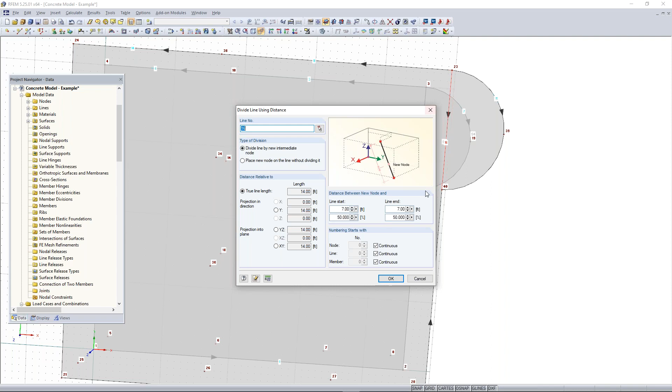Now we want to divide line 16 by a distance of 7 feet. I'm going to right click on line 16, go to divide line, go to distance, and we want to divide this 50%, or 7 feet, from the start or from the end, it doesn't matter. We click OK, and now we have our center point here, with line 16, 17, and then again line 10.

And now we can simply just delete. We can take this also out of perspective view and put it back in isometric, and we can delete our two different surfaces here. So we can delete our surface there and our surface here. And we also want to delete our lines 16 and 17.

One way to do that would be to go to the project navigator, under the lines folder. This is just another way of deleting or editing lines. I can hold Shift and select both 16 and 17, then hit delete on my keyboard.

Now we want to redefine our surfaces. If you're importing surfaces in from AutoCAD, you may just get the boundary lines only. So if you need to redefine a surface based on boundary lines, you can do that with a tool up here next to the surfaces tool.

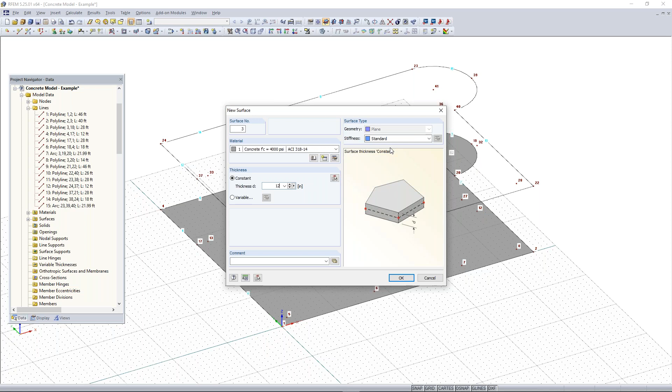If I hit this drop down arrow, I can go to select boundary lines. I want to change this thickness from 8 inches to 12 inches for our ceiling slab. The material we can keep as concrete, and the stiffness as standard. Click OK, and now all we have to do is choose our boundary lines. You can see now we have one large surface for our ceiling slab.

Now we want to create an opening in our ceiling slab right here where our staircase will go. Pretty simple - to create openings within a surface in RFEM, there is the opening tool here. We can go to openings, and we have rectangular, semicircle, but we want to choose the circular opening.

We can simply choose node 41 for our center node, and this circle is going to have a radius of 6 feet. I can either choose this graphically - if so, I should define a step and change this to something like 1 foot, and now I could easily set the radius to 6 feet. Or I can drag my cursor into this box, highlight the parameters, change this to 6 feet, and hit enter.

Now you can see if I right click to cancel out of that tool, we have our circular opening here, and that will act as the opening for our staircase.

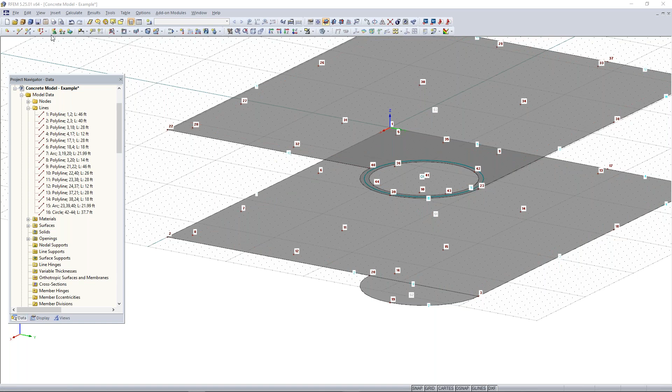We're going to draw a line that's 7 feet from node 20, at the coordinates 46, 19, 0. So if we go to 46 and 19, we can select this and draw our line all the way up to our ceiling. You can see the snap function shows you're drawing perpendicular to the top surface. If I left click, our line has been drawn perpendicular to both our floor and our ceiling slab.

Now I can draw another line on the other side to define our second wall. This one I need to draw 12 feet from node 3, at the coordinates 34, 40, 0. So let's go 34, 40, 0, and then draw this line all the way up to the ceiling slab. You can see again it snaps perpendicularly to the top there.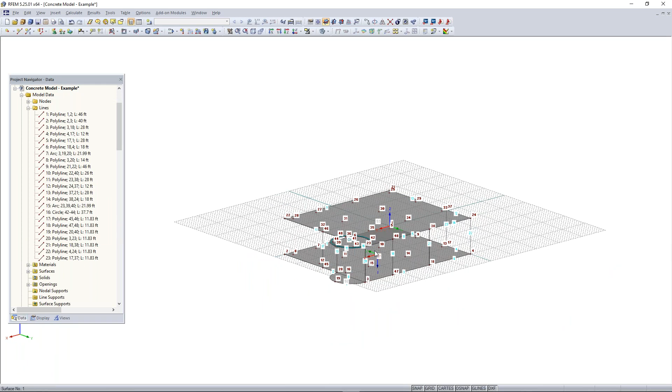Pretty easy. Then I can right click, and now all we need to do is connect node 20 to node 40, then 3 to 23, then 18 to 38, 4 to 24, and then 17 to 37. So now we have all of our boundary lines basically for our walls.

So the last thing to do is make sure that where our vertical lines connect, these lines are all split up throughout our model. We can use the connect lines or members tool to connect those lines and split all of them up. I'm just going to highlight the whole model, and now you can see these lines here are split up and connected.

Now we can create our surfaces. There's also an option where if you right click and go to this option here, auto connect line/members. I have this turned off, but if you have it turned on, then anytime you connect a line to another line, it will automatically split the line. With it off, you can do this manually using the connect line/members tool.

Now we want to create our walls here, and again we can use new surfaces via boundary lines. These walls will have a thickness of 8 inches instead of 12, so we'll change that and hit OK. Then I can simply go around and select the boundary lines for our walls here.

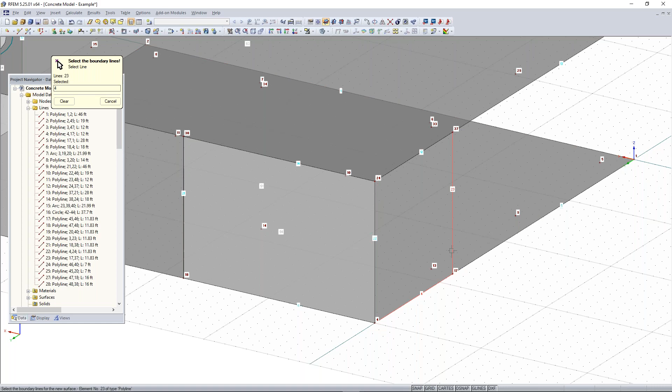You have to make sure you select these in a chain operation. If I choose this line, I can't choose this line up here - I have to make sure I go around so they're all connected.

Now you can see we have our flat walls there, and now we just need to create our curved wall here. To create curved surfaces that don't lie in a single plane, if they have 4 boundary lines, you can use the new quadrangle tool.

If I go up here to this tool, we can go to the quadrangle tool, general 4-sided surface. I'll click on that, and you can see again we can choose the thickness and the material. I'll click OK, and then we can simply choose the boundary lines of our surface here. Now you can see we have our quadrangle surface.

So now we have basically all the walls to connect our floor slab and our ceiling slab. We're missing one more in the center, which will be our load-bearing wall.

So what I need to do now is change the origin of our work plane to node 18 here. To change the origin of your work plane, you can go up here to this button called Set Origin of Grid/Work Plane, and then we can select node 18.

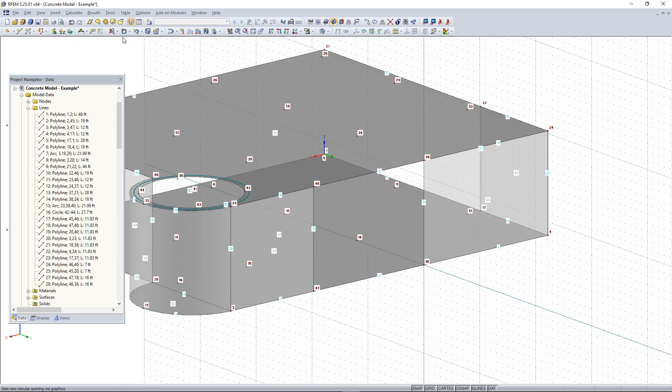Then I can change my work plane to the XZ or the YZ plane, and draw a new rectangular surface. I'll click OK, then I just need to select node 18 and node 34. And now we have our new wall there.

Oops. So that'll be our load-bearing wall in the center.

And we can move on with creating our columns now. There's different ways to create these - we could just use the new member tool.

Also, another way to create members would be to just draw the line first. So if I go to create new line, and then connect nodes 5 to 25 here, I can take this line and double click on it.

Then I can go up to, we have a couple different tabs up here - you can add supports and FE mesh, or we can add a member to this line. So I'll click available.

What this will do is bring up the new member dialog box. From here I can treat this line as a new member and give it a cross section and material. So I'll go to import from cross section library.

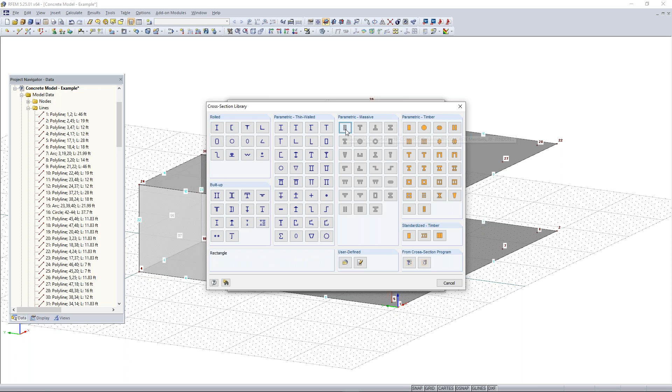Once that comes up, I'll go to my parametric massive sections, and then I just need to type in the dimensions for the column. These columns are going to be 12 inches by 12 inches, and the material is going to be concrete 4,000 PSI.

Now we can hit OK, and then you'll see the cross section pop up here. We can hit OK again, one more time, and now you'll see that our line has turned into this 12 by 12 concrete cross section.

Now I just need to take this cross section and add it to the rest of these nodes here. I can do this by holding control and then dragging this over to create a copy of it. So I'll hold control and drag that one over, and then I'll undo that - let's try that one more time.

And let's see if - there we go. Select this column, and now we have our row of columns here.

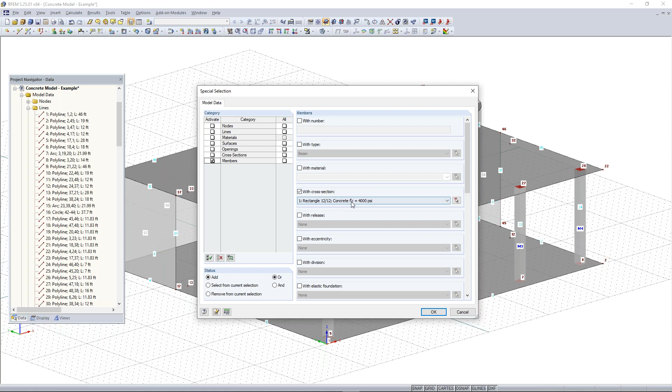And then we can use this to select different categories. So let's say for these columns, I just wanted to select members. I'll activate members, and then choose on the right-hand side which type of members I want to select. I'll choose cross-section rectangular 12 by 12, and those are exactly my columns. I'll click OK, and now you can see it selected all of my members with that cross-section.

So what I can do is just hold control and then left click and drag, and now you can see that I made a copy of my rows there. That's just an easy way of modeling the same thing. So then I just need to add one more column to connect 15, nodes 15 and 35, so I'll make one copy of that. And now we have all of our column members.

So now the last thing we need to do is create our load-bearing beam, or downstand beam, that's going to connect our outer wall here to our load-bearing wall and to this column right here. So I'm just going to delete my node there, and to create this beam we can go up here to new single member.

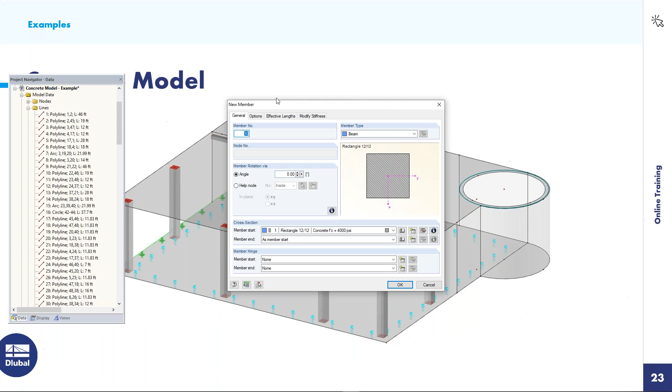And now I can just create a new member again, so I'll go to import from cross-section library. Once that opens up, this downstand beam is going to have some different dimensions compared to our columns. This beam is going to be 12 inches by 12 inches.

And it's also going to be a rib element. So if we go to our member type here, we want to change our member type to rib type. For rib type members or beams, if we go to edit member type, you can see that for a rib there are two different integration widths on each side. This is going to integrate into our ceiling slab here, and we can have our beam drop down and be on the positive side of our slab according to the local z-axis of the slab, so you can see what that looks like. We can also choose the width of each side, and for this example we'll have it be L/8, that'll be the width of each side there, and then we can click OK.

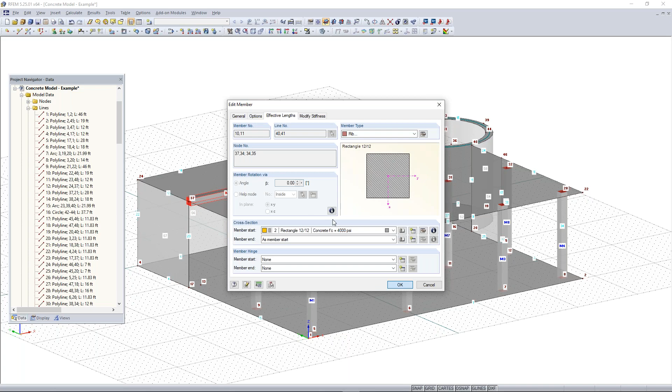So then we can draw our beam here and connect it to our load-bearing wall, and then connect and draw it to our column. Then we can just hold Control and select both of our members here, and change our member type to rib, and redefine those parameters here. Again, our rib is going to be on the positive side of the slab for the alignment, and our integration widths for side 1 and 2 will be L/8. We'll click OK, and you'll see that the program will drop this part down with an eccentricity, and the integration widths are there, but they're just not rendered.

So now we have our downstand beam, and the next thing we can do is add in our last opening to the back of our model here. This will be our opening window into this wall, and it's going to be 9 feet wide and 5 feet high, located 3 feet above the surface axes there. So what we need to do is change the plane from the XY plane to the XZ plane, and then change our origin to the back corner here.

And now we can draw our opening, so I'm going to go up here to rectangular opening, and this is going to be 9 feet wide and 5 feet high. We want to start drawing it right here, and that'll be the first corner. Then we can put the last corner, and that'll be right here, 4 feet, 8 feet above. And now we have our opening.

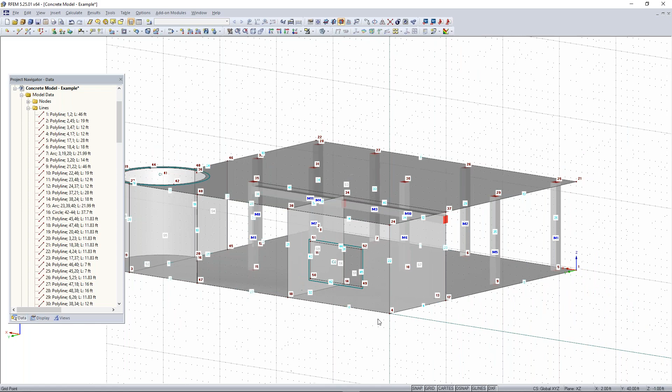So now that we have almost our whole model created, we just need to add supports to it. We can add supports to the left side here. So we'll go up to new line support.

We're going to assume that this building is right adjacent to another one, or the foundation of this building is adjacent to another one. So we want this line support along this whole entire length here. We also want to make sure that it's defined correctly, so this side's only going to be supported in the vertical direction. We want to take away translation.

If you check something, that means it's fully fixed. If you uncheck it, that means it's not fixed at all. You can also add spring constants if something's partially fixed. For this condition, it's only going to be fixed in the vertical direction. The X and Y directions will be released, along with the rotation. So we'll click OK, and then click OK again.

And now you can see we have our line supports there. And then we also want to add in some surface supports. So we want to put those on the whole entire foundation slab here.

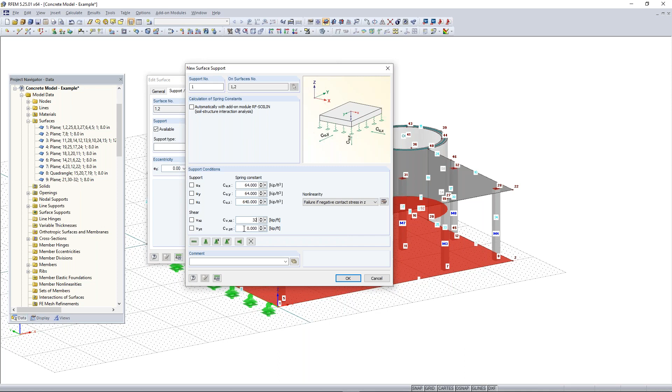And then for shear, we're just going to enter some parameters for the spring constants, since it's not fully fixed in those directions. We'll do the same thing for the shear direction, type in some values for the spring constants, and click OK.

And now you can see our support is defined there under that tab for both our surfaces 1 and 2. So we'll click OK, and now you can see on both our surfaces here we have our blue supports, and those are our nonlinear supports. So if your supports are blue, that means they have some kind of nonlinear definition to them.

If they're green, that means they are linear. And these supports, and all supports, are all applied at each FE mesh point as well, so it's just graphically shown on the perimeter for rendering reasons. That's how that's run.

And then we need to add in stiffness modifications. According to the American Concrete Code, the ACI 318-14, we need to modify the stiffness of our concrete columns, walls, beams, and flat slabs.

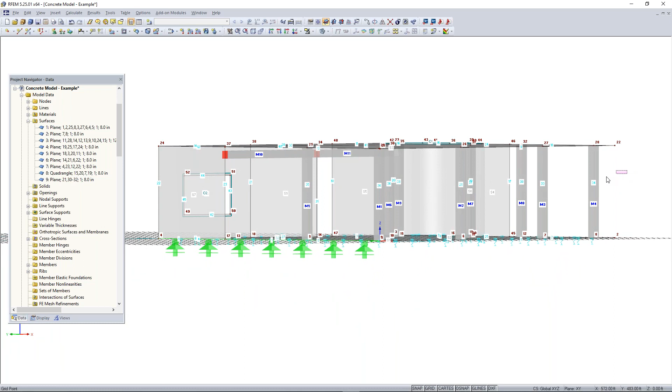To do this, we can simply rotate our model to an elevation view and select and highlight all of our columns and everything here. Then we can right click on any of these elements, and we want to edit our members. So we have 9 columns here, so we'll edit them.

This is how we can modify the stiffness of our members. So we can go under the edit member dialog box and go to modify stiffness. For the definition type, you can either modify your stiffness using your own user-defined multiplication factors, or you can modify it according to standards. So we have the Canadian code and also the American code for steel and concrete. We'll choose the ACI, and then we just want to make the component type columns, and the multiplication factors here are automatically taken from the standard for columns.

We can click OK, and then we can just do the same thing for our walls. So we'll go to surfaces and edit, and then we can change the stiffness by going to the modify stiffness tab, and then we can change this to the ACI and set this to walls uncracked.

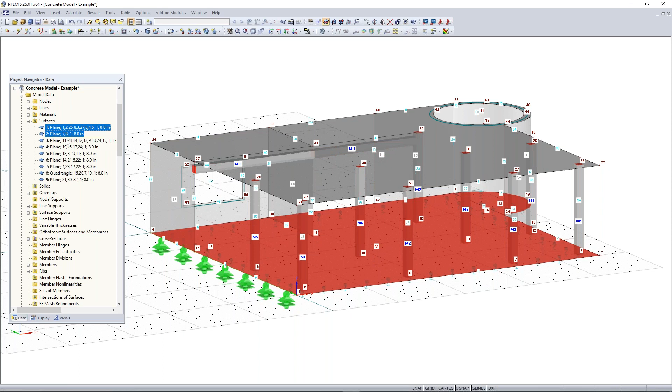And then we can do the same thing for our plates and slabs. So we can select both our bottom plates here and then also our ceiling slab, right click on them, edit surface.

And then we can change our stiffness here to something like according to the ACI, and we want to set this to flat plates and flat slabs.

And then the last thing we would need to modify is the beam here. So we can hold Control and select both of those, go to edit member, and then we can modify the stiffness of the beam here. So it will be according again to the ACI, and then this will be for beams.

So now we have all of our stiffnesses modified, and the next thing we would need to do is run through the loading, but it looks like we're running a little out of time, so we only have a couple minutes left. So what I can do real quick is just create a new load case that just involves self-weight instead of adding any loading, and we can just quickly see what the results would look like for this model. So I'll just create that real quick, and we'll just run the model based off of self-weight.

So this will run and shouldn't take too long since we don't have a lot of loading. So this is basically what the results look like.

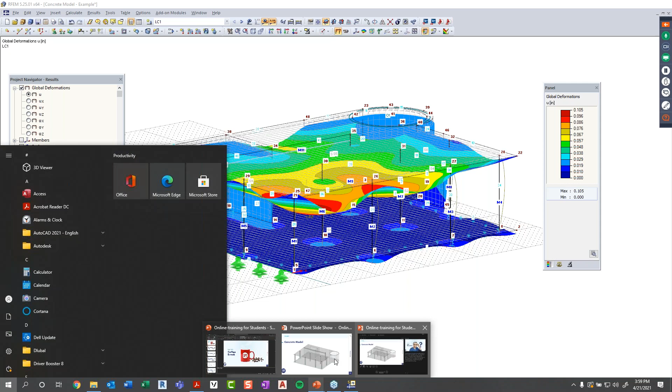And so we can go back to the PowerPoint, and then that basically takes us to the end. So are there any more questions that anyone has, anyone would like to ask before we end the presentation today?